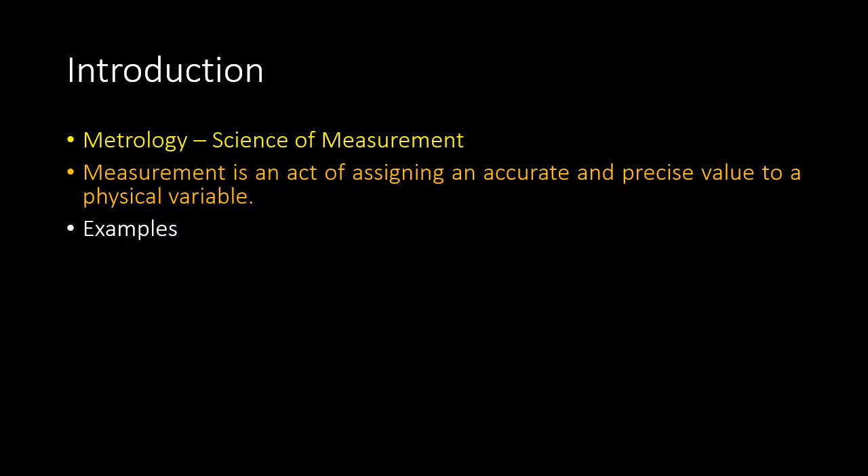Some examples of measurement in our day-to-day life are groceries. Whenever you go to a grocery store and you buy something, whenever you want to tell the shopkeeper or grocery owner that you want something, generally you specify weight. So most of the items in a grocery store have weight as their attribute or parameter.

Another example is water, electricity, fuel, whose consumption is measured by using a meter. Okay, so in our house we have a meter that reads the consumption of water, and there is a separate meter that measures consumption of electricity.

Weather: in our mobiles nowadays, we get the data on weather, temperature, humidity, and other parameters. Percentage battery charge in the devices that are powered by a battery. Tire pressure. So whenever we go to inflate the tires of a vehicle, the person who is inflating the tire has a pressure gauge. So that is another measurement that we encounter in our day-to-day life.

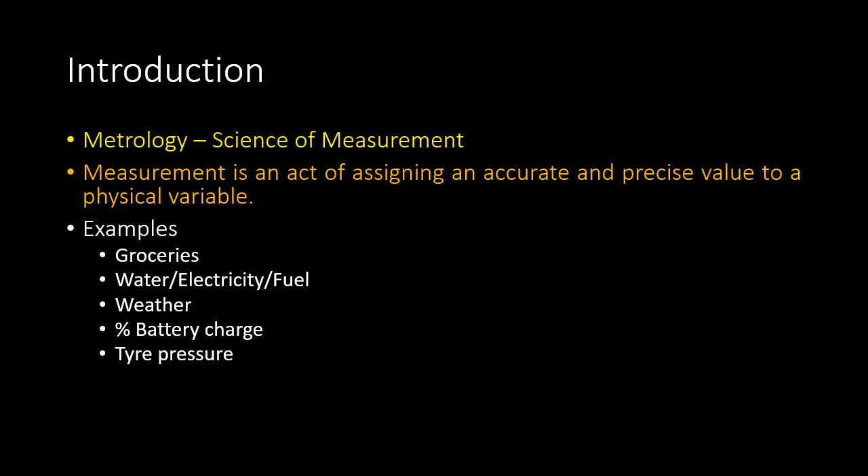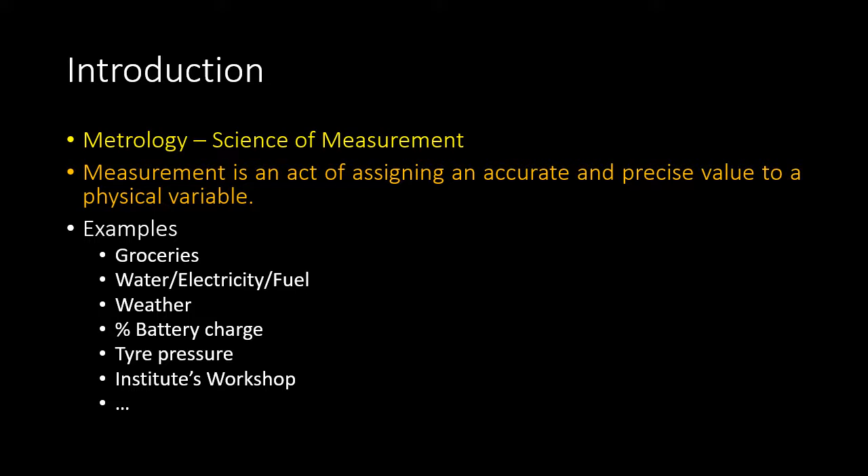In our institute's workshop, you must have measured so many parameters using different measuring instruments such as vernier caliper, micrometer, and others. And there are so many examples. In fact, measurement is indispensable, or human life is not possible without measurement. In every field that exists on Earth, let it be communication, energy, geology, biology, whatever, every field involves measurement of some or the other parameter.

Some application areas that involve metrology are mentioned on this slide. For example, aircraft pilots. So during a flight, an aircraft pilot measures the following parameters such as altitude of the aircraft, course of the aircraft, by course means direction, what is the current fuel consumption, and speed of the aircraft.

And based upon the data about these parameters, the pilots may set an alert. For example, if the fuel consumption suddenly increases, then there might be some fault associated with the storage of the fuel or its consumption. If suddenly the altitude of the aircraft starts dropping, there might be a problem with the engine. So based upon these measurements, the pilot may set an alarm.

Similarly, if you go to a doctor, the doctors are equipped for measuring the following parameters such as temperature, pulse rate, blood pressure, weight, and height. If doctors want other data from your body, such as contents of your blood, the doctors ask you to go through certain tests. But if you go to a doctor, generally the measuring instruments are there to measure these parameters.

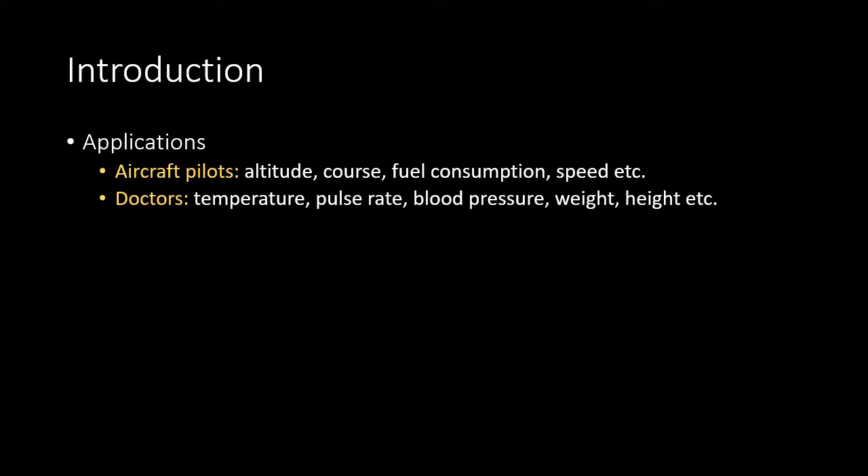Maritime authorities measure buoyancy. In a car, generally on the dashboard, you can see the values of parameters such as distance traveled, indicated by the odometer, current speed of the car, measured by the speedometer, and there is a fuel level indicator, outside temperature in some cars, and in some other cars even instantaneous tire pressures are also displayed.

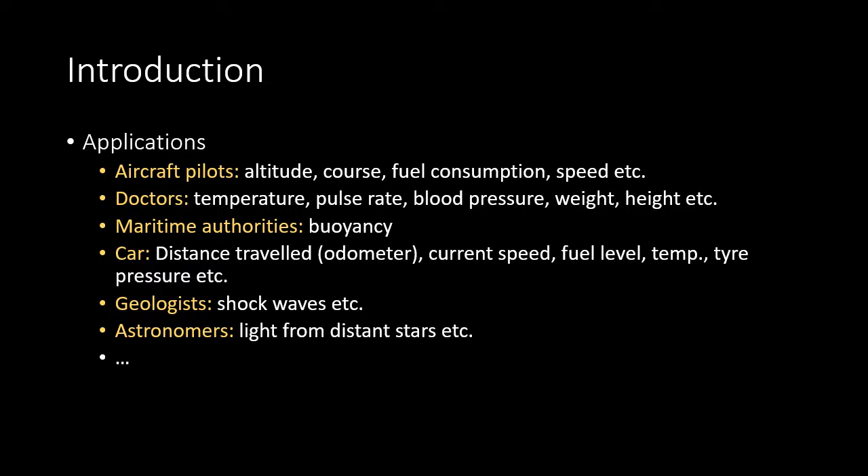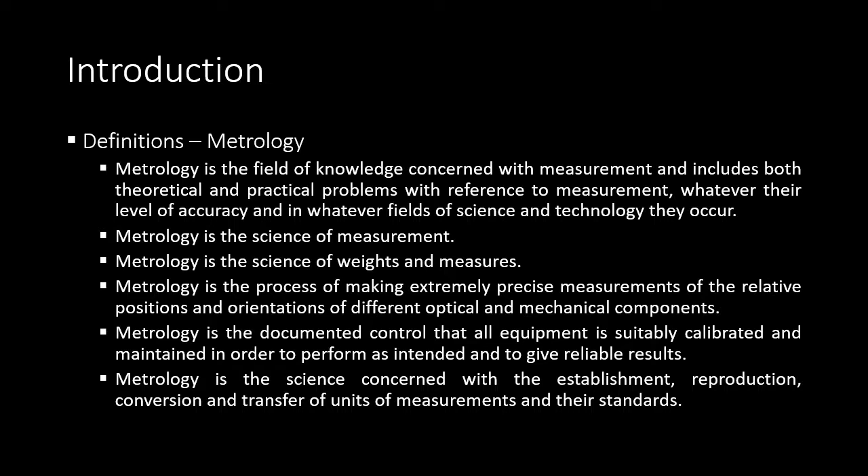Geologists measure shock waves that arise during the earthquake. Astronomers measure light from distant stars to find out their distance or their composition. And there are so many other applications that involve metrology or measurement of some or the other parameter. And hence science is completely dependent on measurement. Science is not possible without measurement. So these are the definitions. I have just put them for your reference.

So what is the purpose of measurement? The purpose of measurement is to establish a unit of measurement. So whenever you use a measuring instrument, for example, a simple ruler, a simple scale, you read the distances. But let's say if you read 1 centimeter, then how much distance is 1 centimeter? Who has established that this much distance is 1 centimeter, this much distance is 1 kilometer?

There are authorities, there are government authorities that establish these standards of measurement: how much distance is 1 centimeter, how much weight is 1 kg, how much pressure is one atmospheric pressure. Okay, so these standards are established by certain government agencies. So this is one of the purposes of metrology.

Then methods of measurement. So if someone wants to measure temperature, ambient temperature or temperature of human body, then what are the different possible methods available or can be developed for measuring the temperature? And perhaps metrology focuses on what are the most economical methods to measure certain parameters. It might be either pressure, humidity, temperature, volume, density, wind speed, whatever.

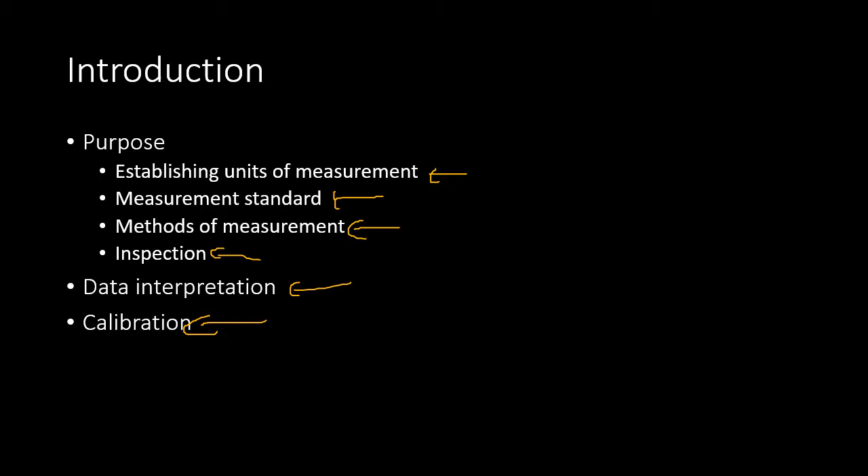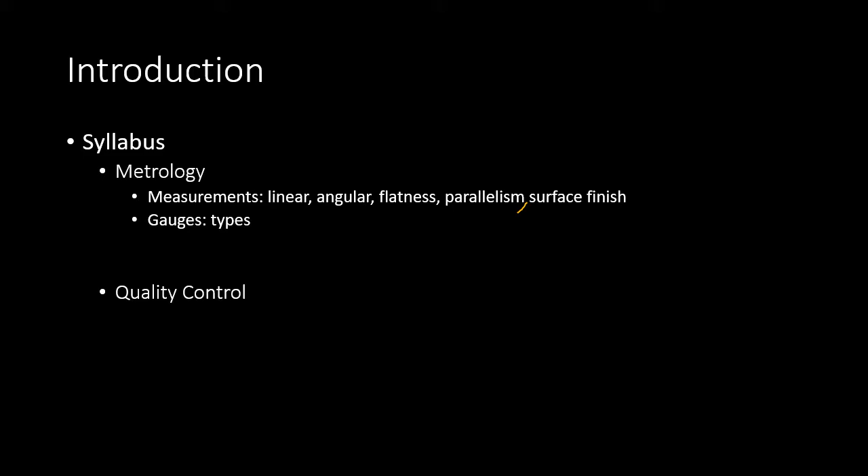You might have even seen a gauge, because if a person has to measure, let's say, length of a certain product and thousands of components of that product, then it is not possible for a worker to measure the same length for 1,000 components of a product. So instead, he uses gauges. So we will see what a gauge is. The limits, fits, and tolerance, and metrology of gears.

In the quality control portion, we are going to study different quality tools such as process charts, flow charts, fishbone diagram, and others. Total quality management, statistical quality control.

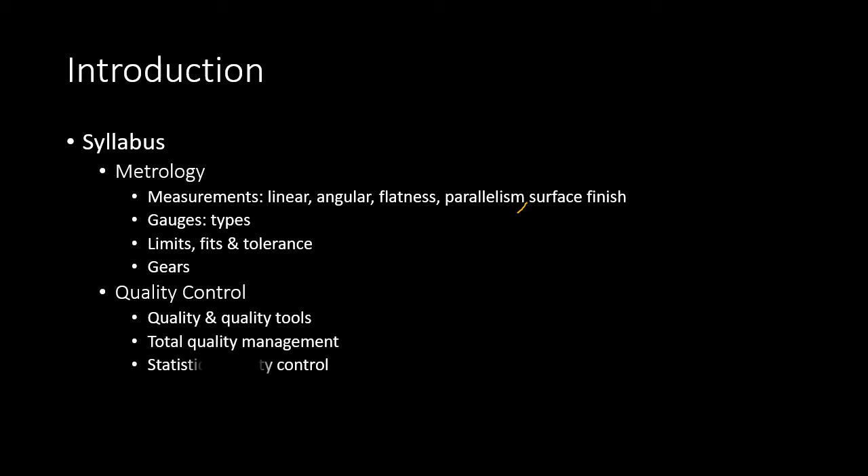For the assessment of this subject, CA1 and CA2, several quizzes and assignments will be announced from time to time. So keep visiting Google Classroom for this.